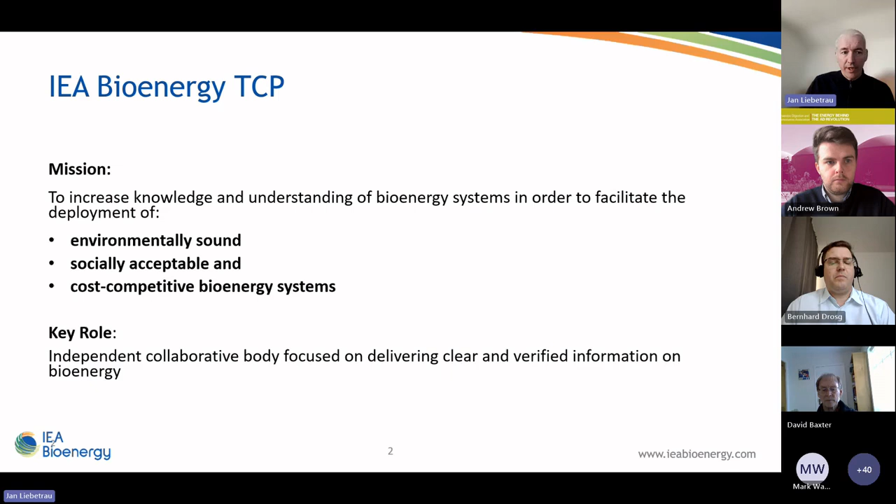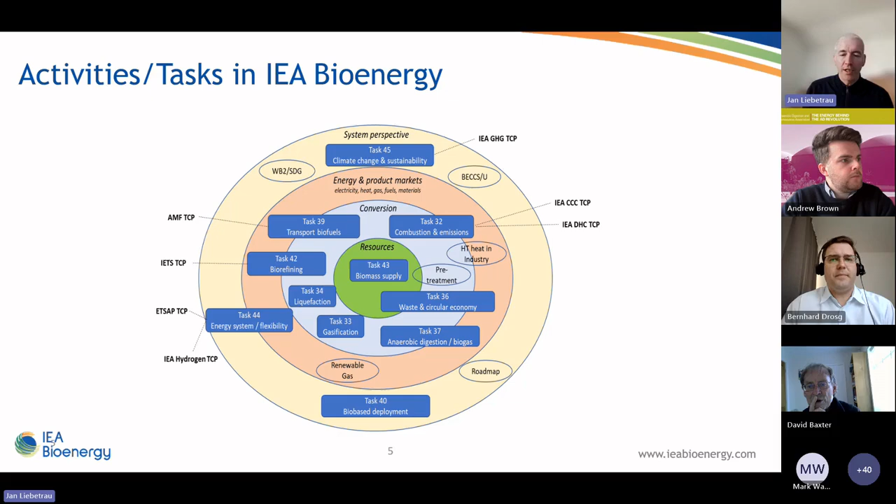Within IEA Bioenergy, the work is again divided into working groups, and they deal with different aspects of bioenergy: system perspective, energy, product markets, conversion, resources. This is how the secretariat of IEA Bioenergy has tried to put that in a frame. Task 37 is called Energy from Biogas, and we are a more technical task, dealing with aspects of biogas production and utilization with a clear technical focus.

We formulate key challenges or key views on the biogas sector, and these are the ones we defined for the last triennium. First of all, biogas technology is not only energy. We are not talking only about energy provision here. That may have been the case 10, 15 years ago, but now we have many more aspects to deal with and also many more benefits from biogas technology.

We also need byproduct valorization in the sector. This is a very important point. We talked recently a lot about CO2 utilization and digestate utilization, the most obvious ones, but there is also climate protection, water body protection, air pollution protection. These are all aspects which come with biogas technologies. One of the main topics in this triennium will be biotechnology process performance, so the microbial mixed cultures in the biogas process. So we will focus on that.

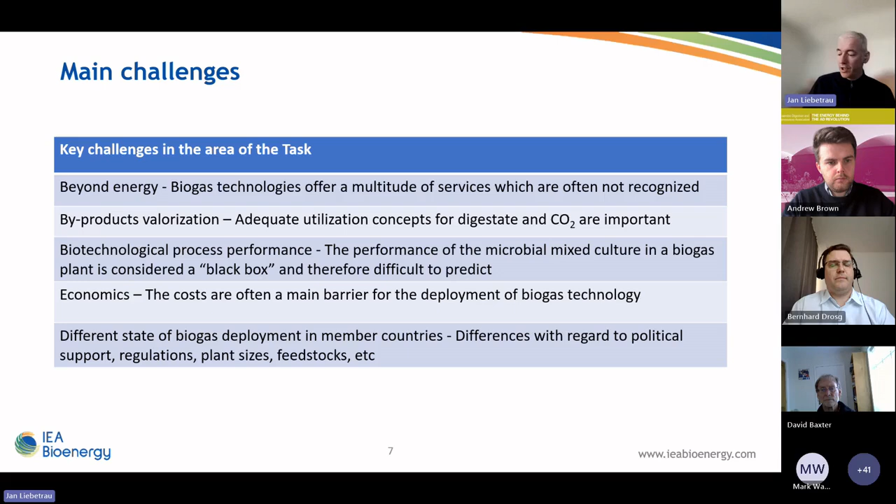This has been the major topics of the work program of the triennium where I was task leader, and which just finished at the end of last year. We focused on co-benefits of anaerobic digestion. There will be a report which we will soon publish on that topic. It's very difficult to quantify that in everything except biogas and digestate, or CO2. You can put masses and prices on that, but it's very difficult to put prices on water protection or other aspects which are co-benefits also of anaerobic digestion.

We have looked at the situation of manure utilization in several countries. There has been a report out in '21, and we have included new countries into this version here, and also came up with some ideas on barriers and how to get manure more into utilization in biogas plants. This report will also be published soon.

Decarbonization of food and beverage industry. We have a couple of reports on that. One will be presented here after that presentation from Bernhard. And the second one we have from Ireland, where it has been more looked into the evaluation of sectoral impact on the use of biogas in that sector. Energy and transport fuels from renewable gases. That was a report published at the beginning of last year. This is mainly looking at power to gas concepts.

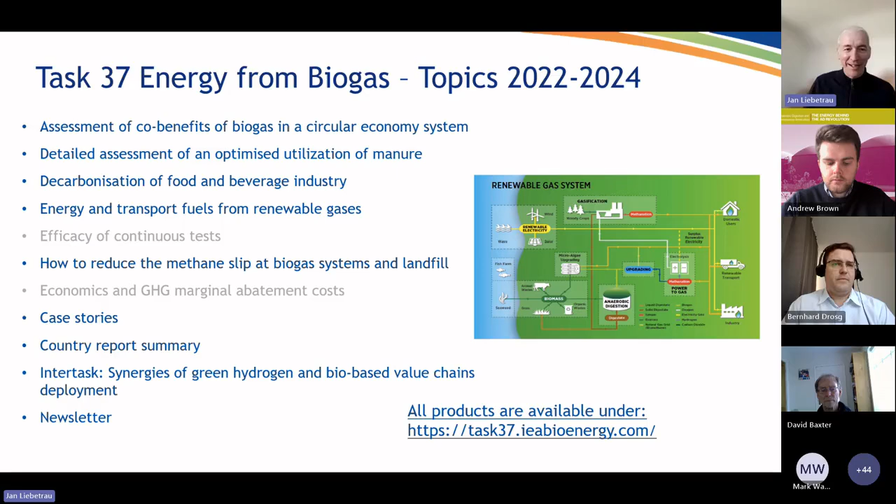And now, last but not least, this was all what we have done in the past, and this is the program for the future here. So we will keep on going with that assessment of co-benefits because we learned that it's quite difficult, and we also have limited resources in the task, of course. But we would like to continue to work on that because it's a very important topic to get an overall evaluation of the technology and not only focusing on energy here.

We would like to look at the utilization of digestate as a fertilizer. There are increasing discussions, of course, on certain substances, materials which are beneficial for the land, but also we have a lot of discussions on substances which are not so beneficial and are discussed to be dangerous. So this is a very important point because digestate as a fertilizer, I think, is one of the crucial aspects of AD applications.

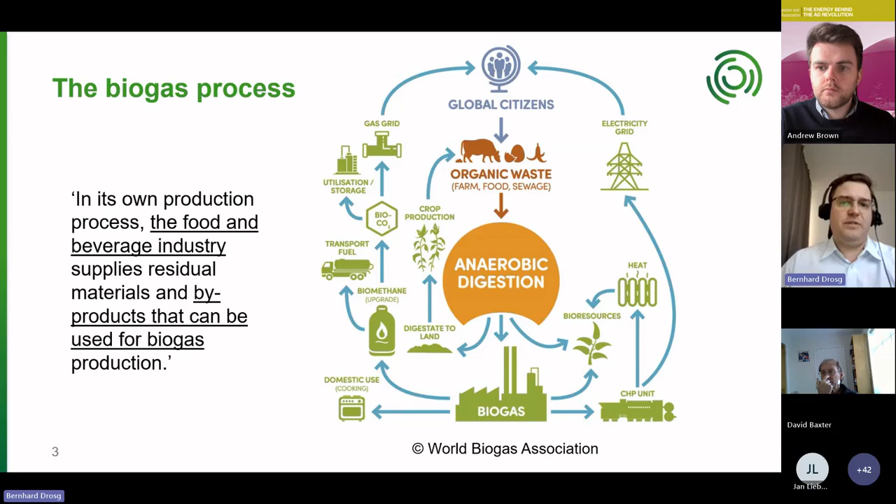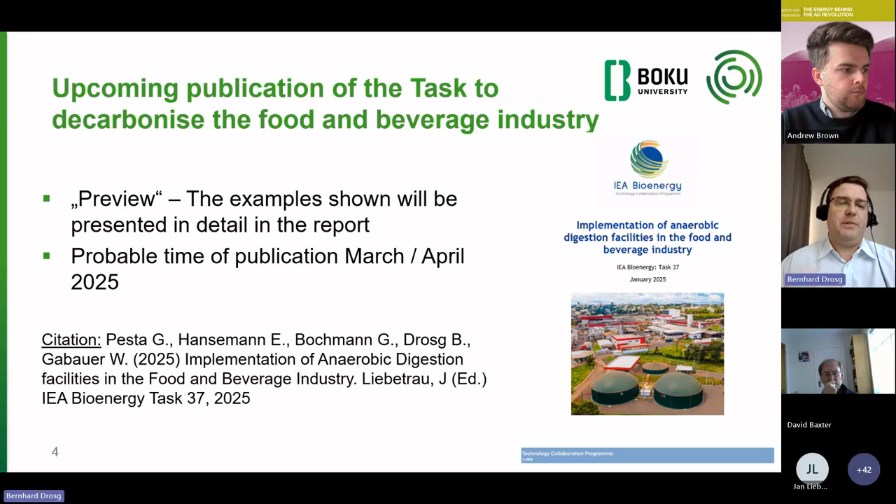Yeah, I have a short sneak preview for you. So this is the report which is actually to be published probably in March. It's called Implementation of Anaerobic Digestion Facilities in the Food and Beverage Industry. Here you can see the citation. So there are also other authors apart from Wolfgang and me which have contributed. And you will find there a guide, especially for the food and beverage industry, how to consider biogas as an option. And then there are given examples of different industries.

So what is important when you think about biogas and the food and beverage industry? So we have here residues, we have waste, and we have wastewaters, which contain organic matter. And there are different utilization scenarios. So you can utilize it for example, reuse. So the resource can be reused in the process, or you have animal feed as a byproduct. And then you go to a final treatment or disposal, which can be aerobic treatment plant, combustion, or composting. It's possible to combine it.

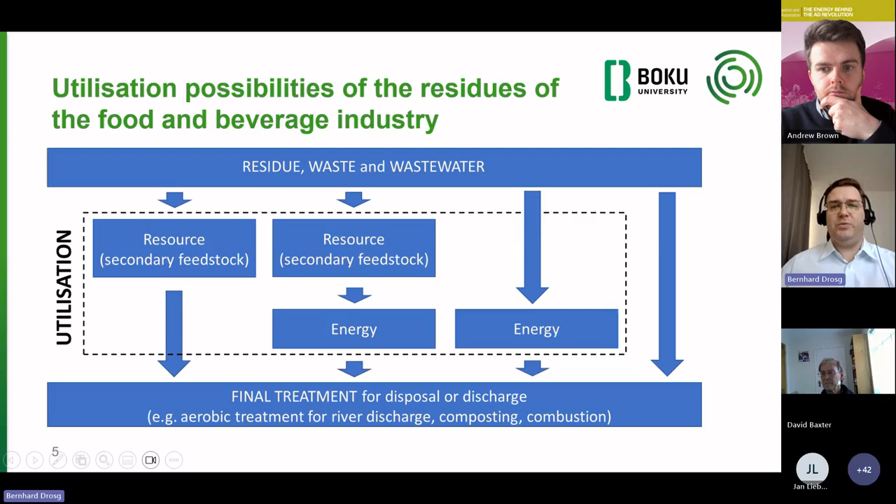So you have here also the option to first take out from the residue some secondary feedstock, put the rest into a biogas plant. And you can directly use, for example, a high-strength wastewater in a biogas plant. Then, of course, if you have a low-strength wastewater, it will be probably directly put to the sewer system or to a river, to an aerobic treatment. So you can see it's a bit different approaches, but for example, here in these cases, we can utilize a biogas plant in the process, and that's what I'm going to talk about today.

So the main part now are the different examples. So we have an Agrana company, which is a sugar producing company. They produce sugar from sugar beet. So they're decarbonizing this sugar production. So there's a plant in Hungary located in Kaposvár where they process about 7,000 tons of sugar beets per day. It's a campaign process, so it starts in about September to January, February. So about half time of the year it's in operation.

And they started in 2007, built about 13,000 cubic meter continuously stirred tank reactors. And they expanded the process in 2012. And in 2015, they put up a biomethane upgrading unit. So to give you some numbers, it's actually quite a large plant producing about 180,000 cubic meter a day. You have thermal energy, which can replace about 80% of the heat demand. So sugar production is quite heat demanding. And so it's about 10 million fossil cubic meters. Here you see a picture of the plant there with some of the fermenters.

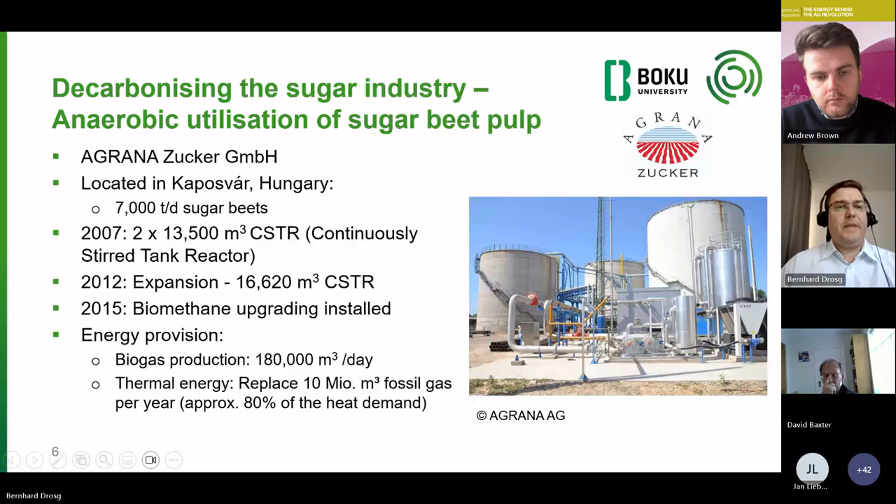There's also the meat industry where we have specific residues and wastes. Here in this case, I first want to show an example from Austria. Here we have the company Großfurtner. They're located in St. Martin in Austria with about 550,000 pigs per year and 50,000 cows per year. They inaugurated their plant 2003. And this is very special because it's a mono fermentation of slaughterhouse waste. So often slaughterhouse waste is used in co-digestion, which means you mix it with a low nitrogen feedstock. And this plant actually has up to 7,000 milligrams of ammonia nitrogen per liter. So it's quite a challenging process.

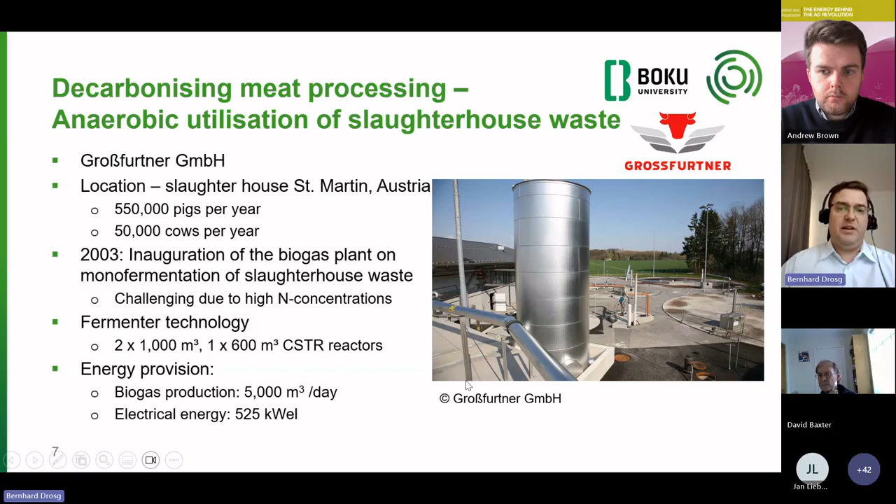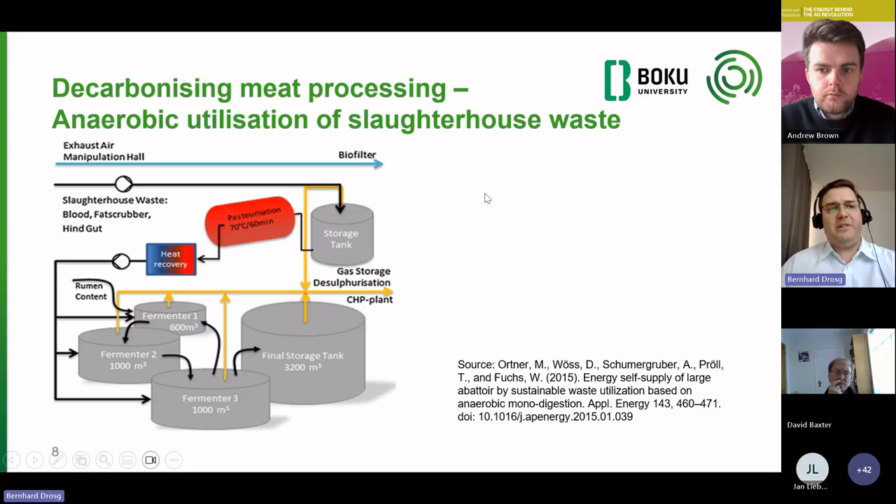An interesting example also from meat processing is Frimesa Cooperative. I'm very thankful to the colleagues from Brazil from the task who provided this information. So it's in the state of Paraná. And they have about 2 million pigs, which are slaughtered per year. And they started 2011 with anaerobic lagoon system, which is actually covered lagoons with not so much stirring and heating. And then they changed 2018 to a CSTR technology.

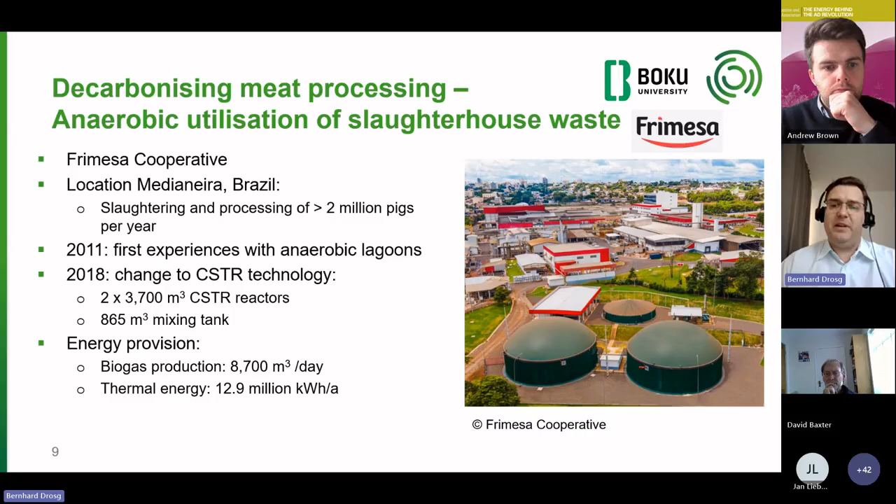So you can see here the two 3,700 cubic meter CSTR reactors, and they have an 860 cubic meter mixing tank. From the biogas production, about 8,700 cubic meters per day, and thermal energy, it's about 13 million kilowatt hours per year. And actually, they use it in the process and replace fossil-based gas, which they had used previously.

Interesting areas also: the distillery industry. So we have anaerobic utilization of the stillage, which is the leftover after, for example, cognac production. The company here is a French company, Revico, and they're located in Saint-Laurent-de-Cognac in France. They accumulate about 300,000 tons of stillage as a byproduct in cognac production. And what is very interesting, they already started in the 1970s with the biogas project.

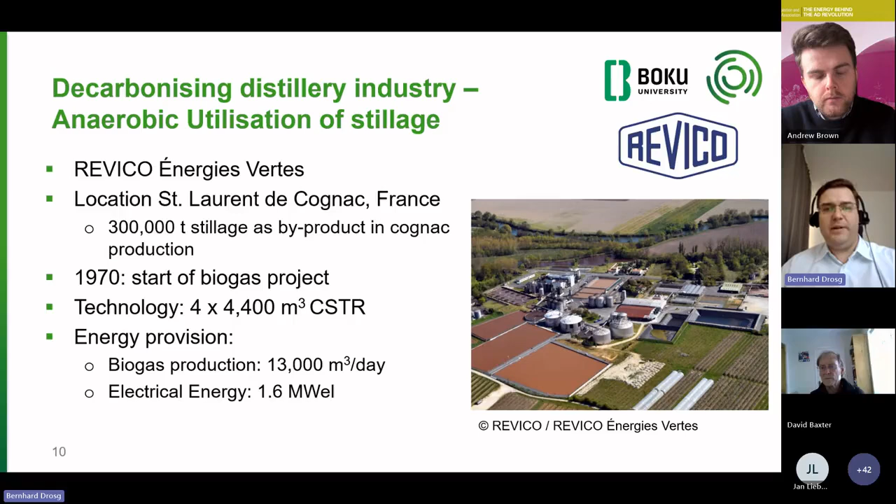The next beverage is beer production. So of course, a lot of consumption worldwide, so also an interesting process to multiply. It's utilizing the brewer's spent grain. Often you find in beer production biogas plants which utilize the wastewater, but in this case, it's about the solid residues.

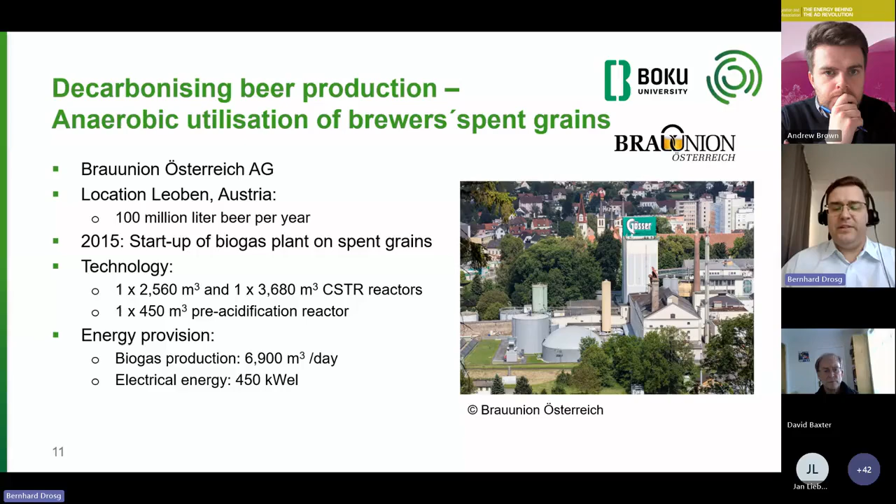Here you can see in the picture, it's called Gösser, but it's part of the Brauunion Österreich, and it's located in Styria in the county of Leoben, and produces about 100 million liters of beer per year. In 2015, the biogas plant was started up. It has 2 CSTR reactors, one about 2,500 and one 3,700 cubic meters, and also a pre-acidification reactor where the brewer's spent grains are pre-treated. The production is about 6,900 cubic meters per day and 450 kilowatts of electric energy.

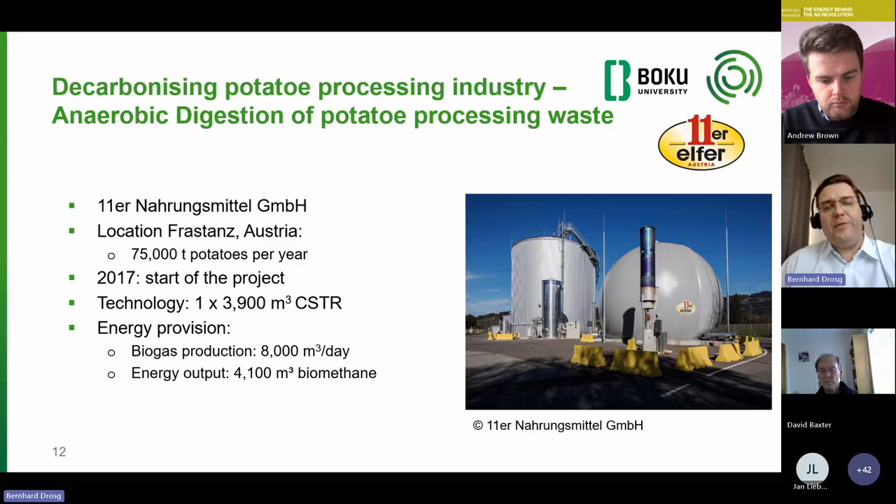So the last example I will show you today is the decarbonization of the potato processing industry. Here we have biogas production from potato processing waste. It's located in Austria, in Frastanz. It processes about 75,000 tons of potatoes per year. The plant was started in 2017, a roughly 4,000 cubic meter continuously stirred tank reactor. In this case, they produce biomethane, so about 8,000 cubic meters per day of biogas or 4,100 cubic meters of biomethane.

Conclusions, my last slide for today. So my intention today was really to show you the broad range of applications in the industry. It's sometimes not that easy to obtain this information, so I think it's a valuable contribution, and also to give examples to other cases. We have in the food and beverage industry wastewater, waste and byproducts, and they can in many cases be interesting feedstocks for biogas plants.

As already mentioned, there is a large variety of examples worldwide, and it's worth mentioning that it's not always possible to buy, in these cases, a biogas technology off the shelf. So the systems are integrated in the industrial processes with the byproduct utilization, and also with agricultural value chains.

And what is also something to highlight is that depending on the boundary conditions, of course, the industry already does it, but just to mention it, normally you do high value utilization, so you reuse parts in the process for food, or you can have animal feed, and then biogas is an option. So I just showed the technological possibilities, but of course, depending on the boundary conditions, another utilization concept may make more sense.